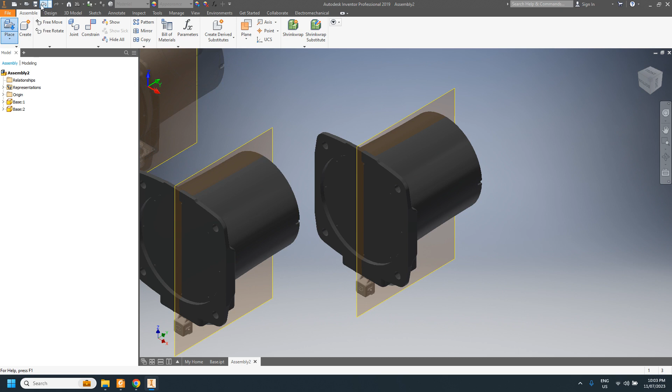So first of all, we put the base. Okay, so we put the base, and we need to ground the base. Now we place joint 1. Then we put the relationship.

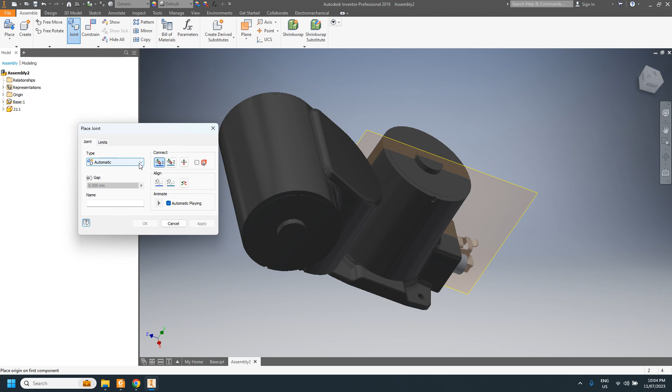We're gonna use joint. I'll tell you why later on when we're doing the animation. It's gonna be rotational. Select the first surface. Select the second surface.

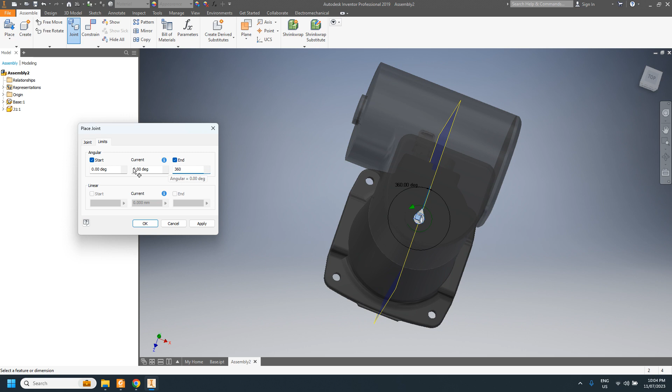As far as I know, the range is from minus 180 degrees, which is the current stage, to 180 degrees. So at the moment, it looks like the current orientation is 0 degrees. That means it will be 0 degrees to 360. What we want to do is put the current position at 180 degrees.

Okay, let's do the test. We put a drive there. So 0 degrees to 360 degrees. Let's test it.

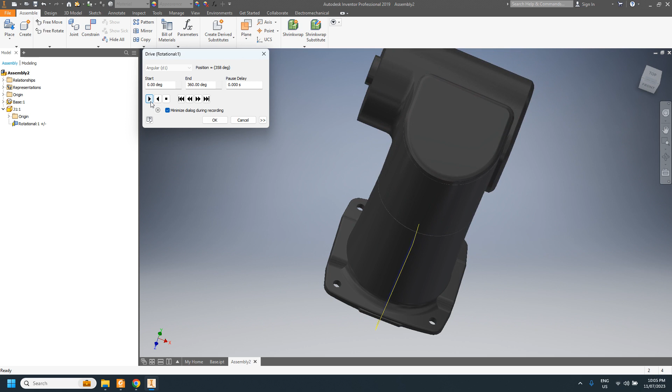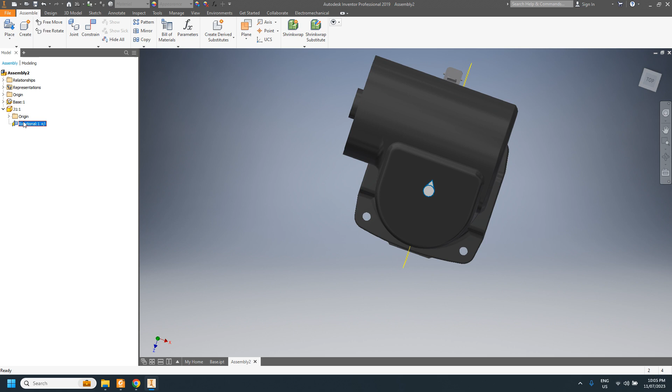Minus 180. 0 degree. 0 degree to 360. Correct. Okay, let's start again. That's the one. Now we put the rotation back to 180. That's the default position.

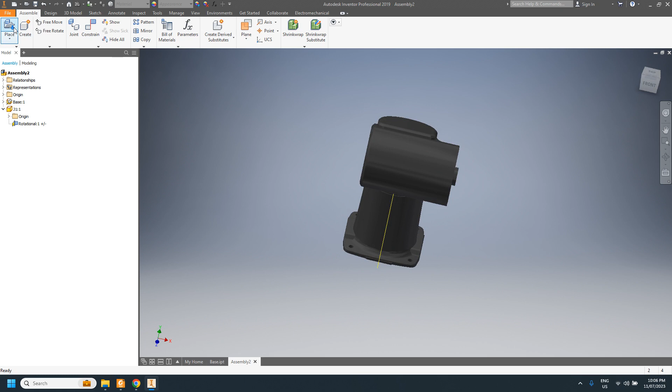Now we put the second joint. This one. Then we check the joint part.

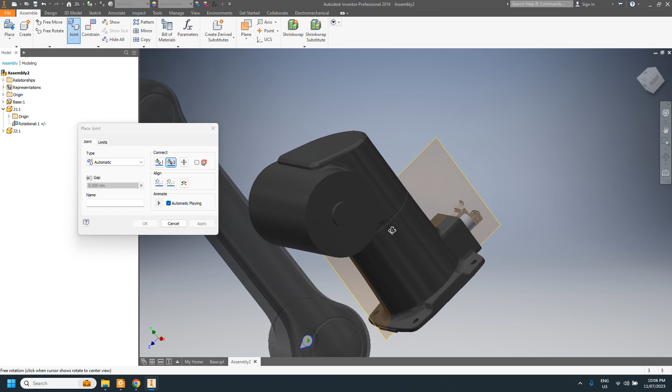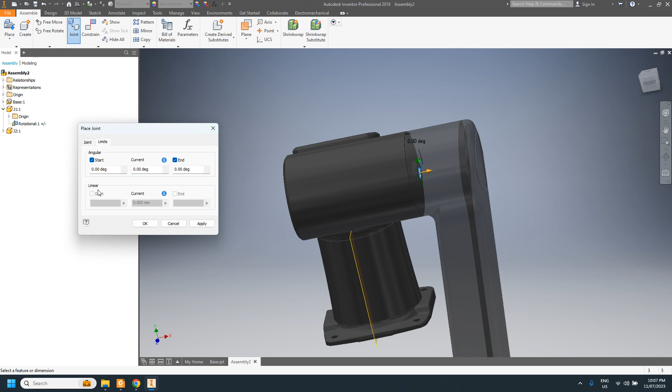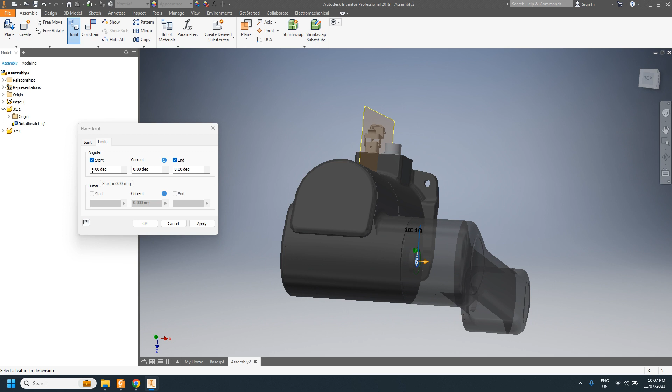Okay, on the menu it says minus 165 degrees to positive 135 degrees. So if this is 0 degree, it will be 300 degrees in total.

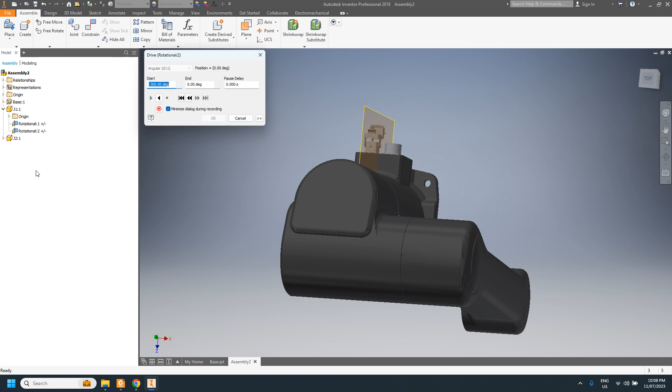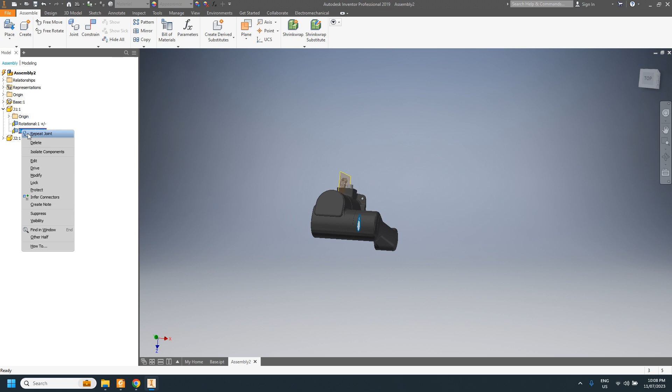100 degrees. Good. Let's put the orientation as the up position. So put current position as 300 degrees plus 180 equals 120.

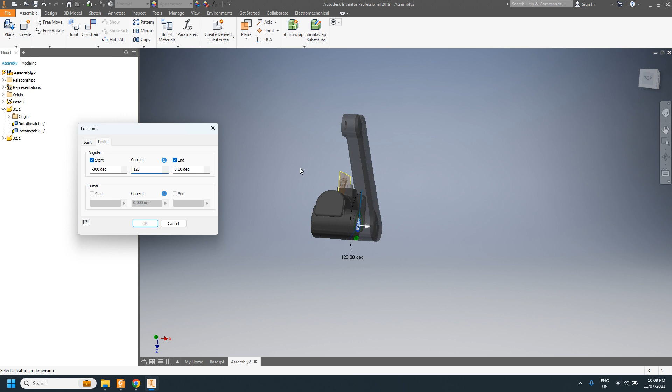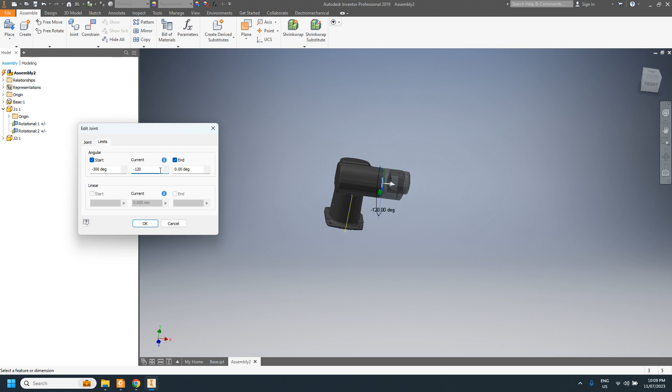Minus 120. Yep, so that's incorrect. Okay.

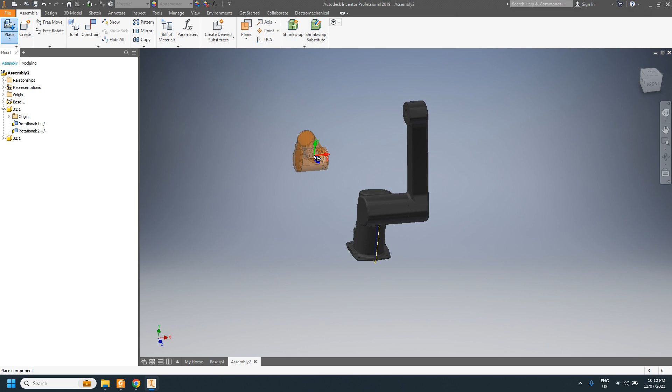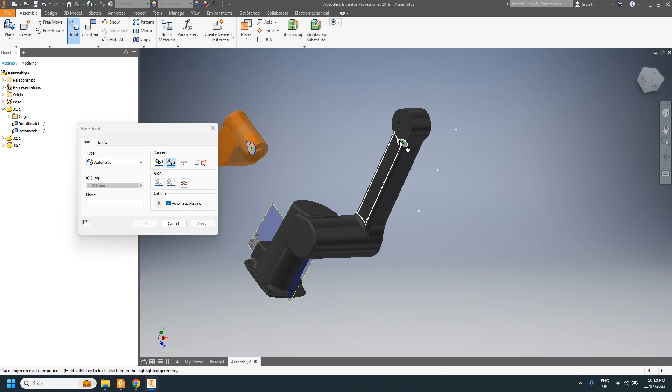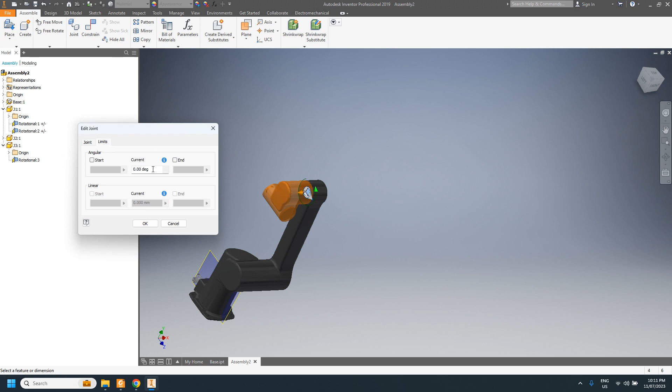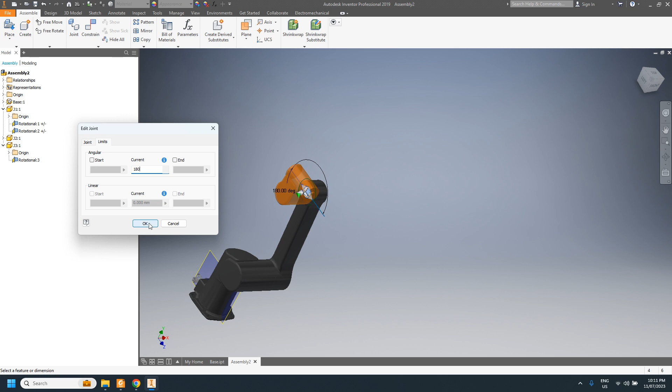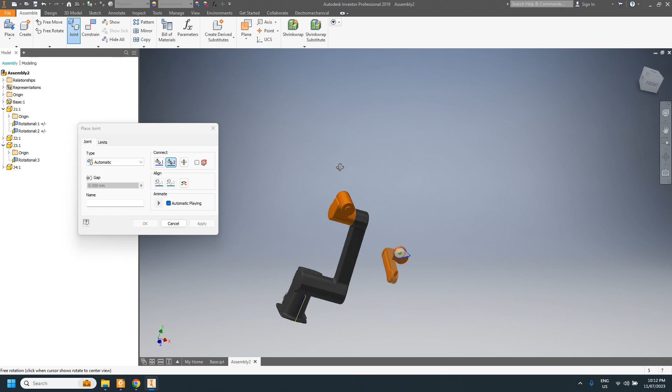Cool, and we insert joint 4. Joint. Surface. Surface. Looks alright to me. The default angle.

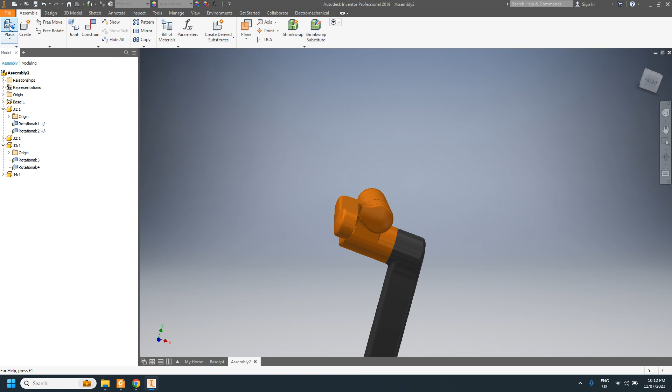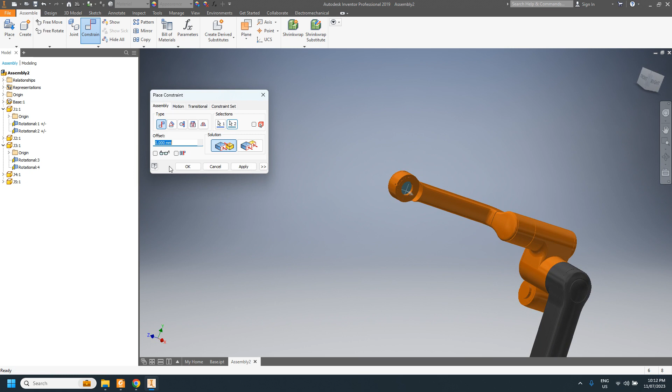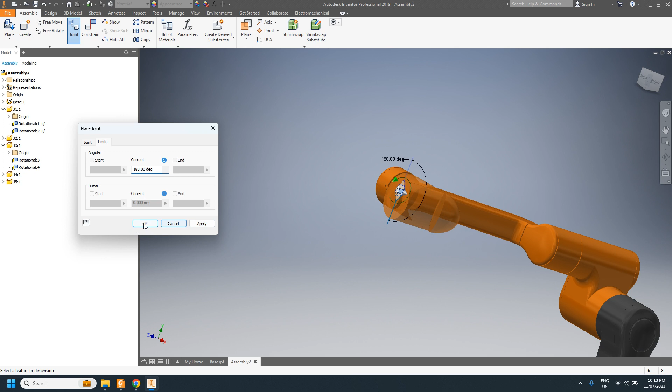Ah, so joint. This one. That one. So with 0 degree, I will put 180 degrees. Okay, looks good for me. I'll put the last joint, which is joint 6. Okay, 6.

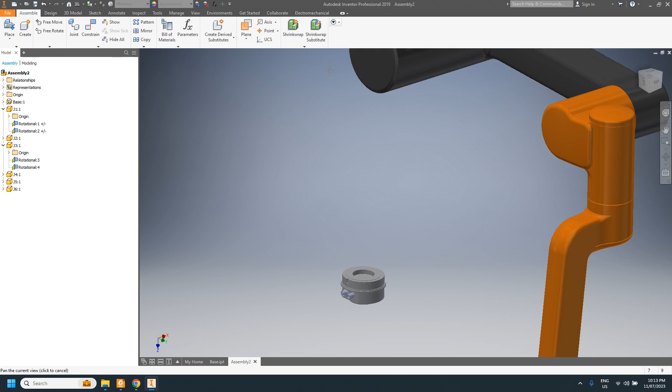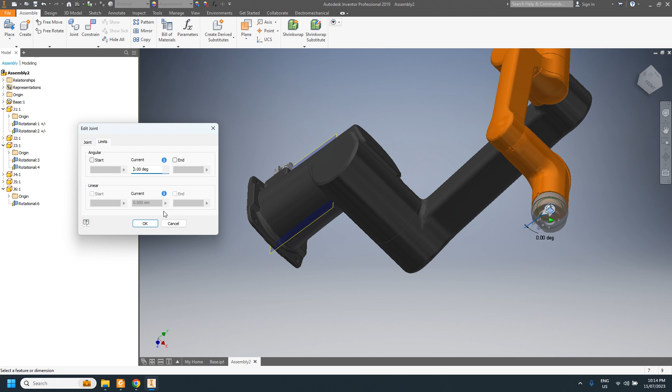Joint. Okay. There's some, let's point the orientation, default orientation is 0 degrees. Okay cool, now we have set up our own robot.

Now we save it as lesson 3. Okay. Okay. We save the current orientation.

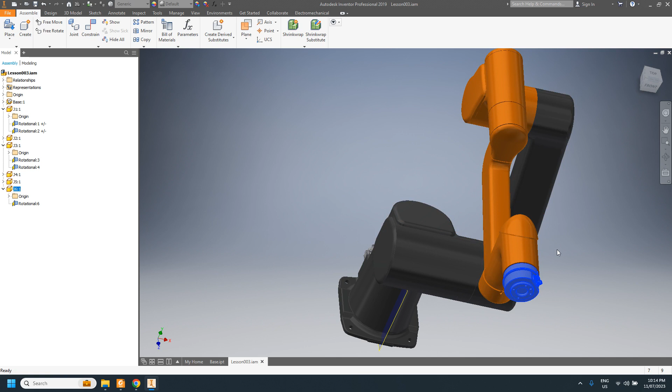Then the key thing is if I grab something, I'll be able to move it. Yep, I can move it. Because there's a lot of singularity, so not that easy, but I can move it.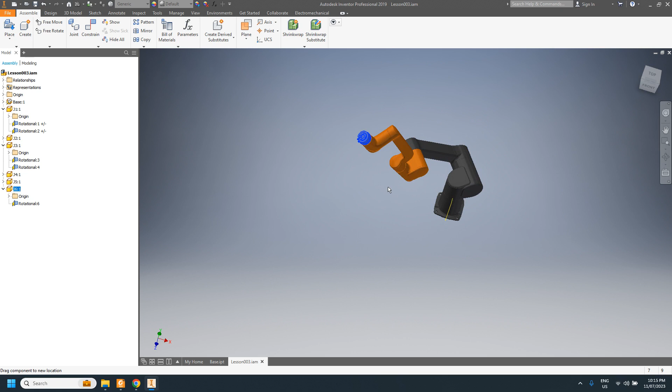The reason I use the joint is in the future I can do the animation, and Inventor will move each angle according to the end effector. We call that an end effector or tool. So if we attach a tool to the thing, we can move the XY, and we can actually assign the path for the robot.